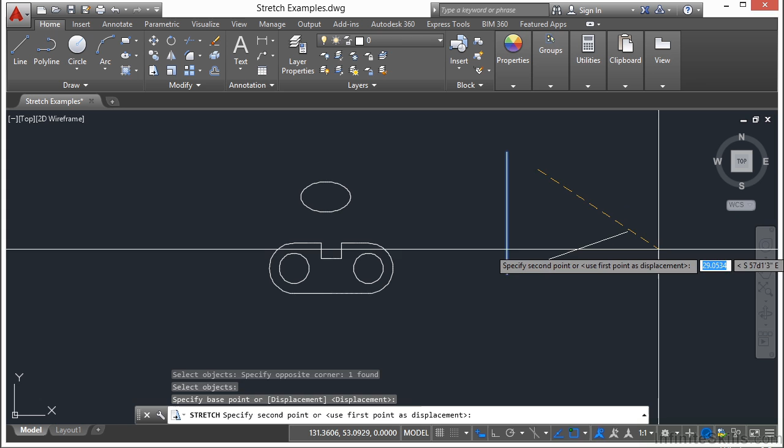Now my ortho command was on there, so it's locking the stretch to a vertical and horizontal direction. But if I turn it off, start the stretch command, select my objects, pick my base point, you can see here that I'm stretching it in all sorts of different directions. So you can use the stretch command as a kind of rotate. You can use it to move an object. You can use it for a lot of different things.

Now, selecting objects to be stretched can be quite tricky because of how the command works. Most editing commands need you to pick the entire object, so it's easy to get your selection right. But in the stretch command, it's not so easy because you're really moving the vertices. And the vertices could be an endpoint, a midpoint, point of intersection, center point of a circle or arc, etc. So you're moving those vertex points, not necessarily the object itself.

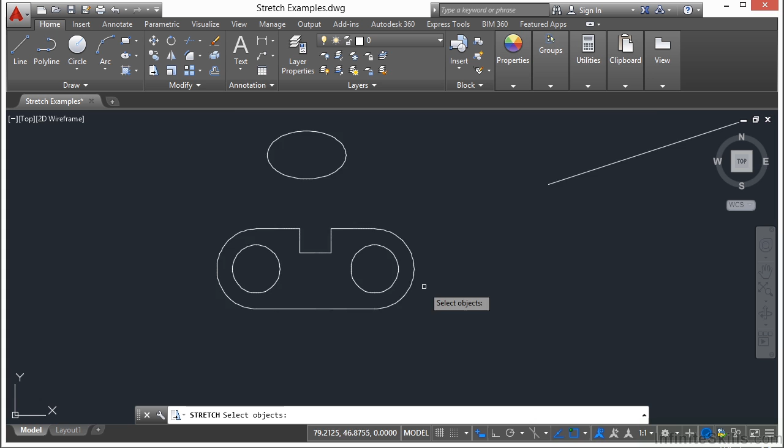So let me show you what happens when you stretch this object here. I'm going to pick these objects here, and you can see as I move my crossing selection window over, the objects I'm selecting become highlighted. So I crossed through and picked up this arc, these two lines, and this circle. I'm going to turn my ortho command back on. I right click and I pick my displacement point, and now I stretch. See, that's really cool. That's really hard to do in board drafting, and this is another tool where AutoCAD is superior to board drawing.

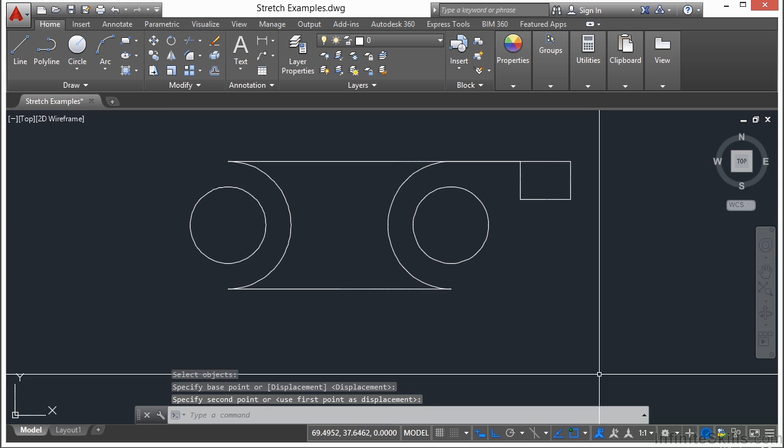So you note that when I started my stretch command, this is what I selected. And I only moved the vertex of the endpoints for this line, for this arc, same here. I also grabbed the center point, or this entire circle and this entire arc. So all of these objects are moving together or being stretched together relative to each other. And if I were to keep going, it would give me an object that looked like that. Undo this, put it back together.

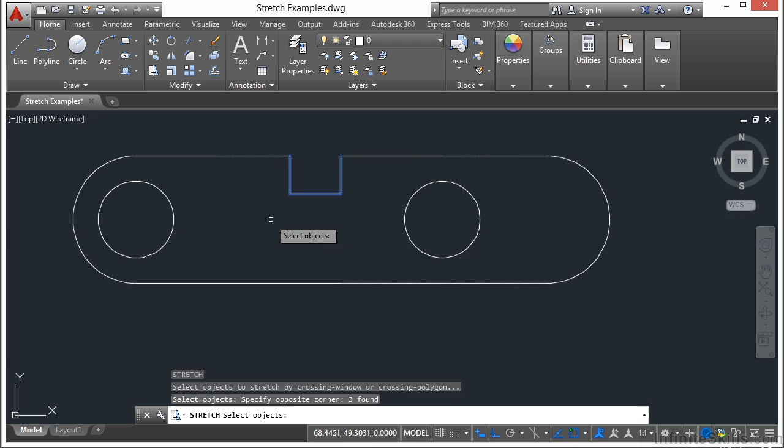Now I can select these objects, and then I can unselect an object from my set. If I hold down the Shift key, and I select that circle, it's removed from my selection set. So I right click, pick my base point, and now I can move this end of this bracket, offset it from this hole that's going to be there. I can do the same thing here. Stretch that. I can just stretch the bottom part of it. And that allows you to make that little cutout larger and in a different position.

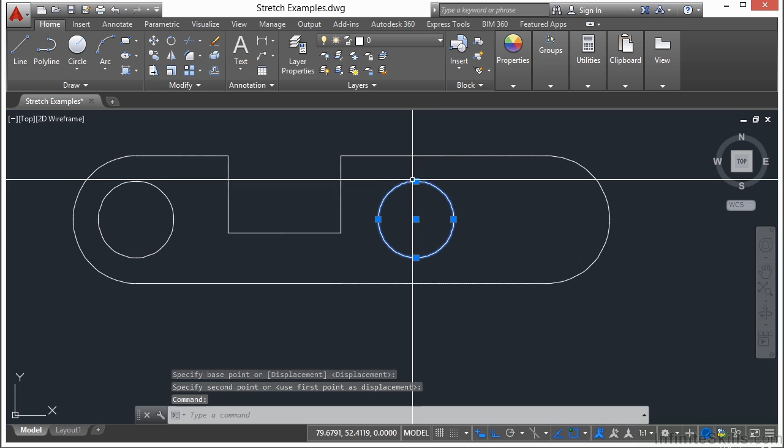One last thing I want to go over with the stretch command. There are some objects that can't be stretched, such as circles. If I try to stretch this circle, all it's going to do is move it. And that's only if I grab the center point, which you can't really see there. That's because a circle really doesn't have any vertex points. It does have these quadrant grips, but you move it from the center of the circle. So keep that in mind.

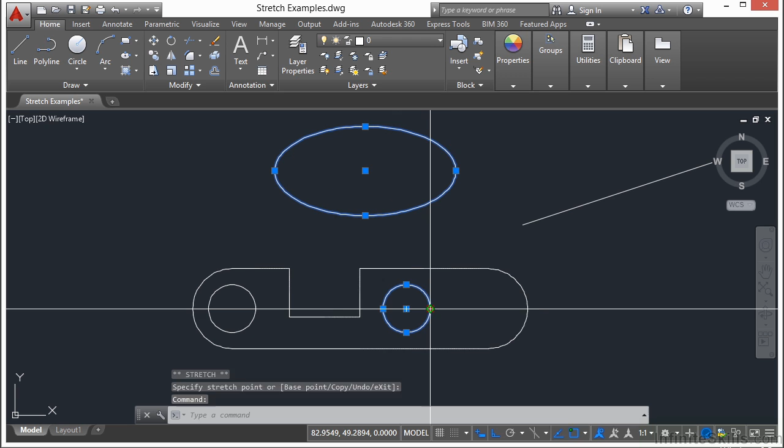Another object is an ellipse, which is what I have right here. That's because its properties are almost identical to that of a circle, as you can see here. So just keep those things in mind. I can change it if you do need to sort of stretch it through grips, grab the point and kind of stretch it that way. A circle works the same way. So if I need to make the circle a little bigger, I can do that through the grips, but not the stretch command.